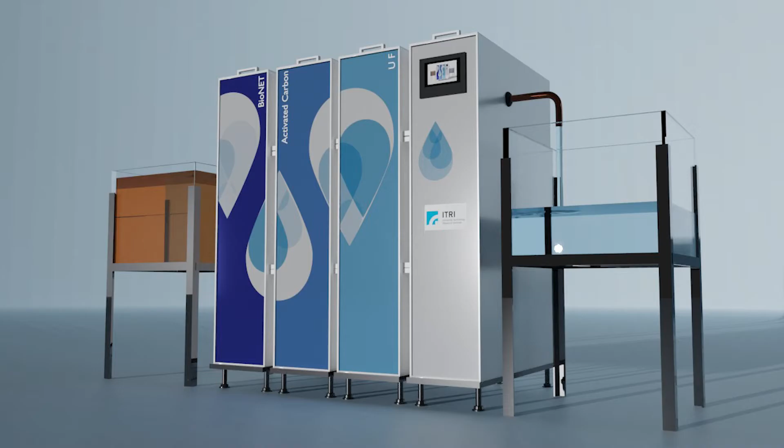I'm Dr. Chani Rallan, and welcome to this webinar where we will be showcasing the QWater system, which is a decentralized drinking water system, and the AIoT smart water solutions for water and wastewater treatment. Both these technologies have been developed by the Water Division at ITRI Taiwan.

So thank you to all our participants for joining us this morning. For the first session, which will be covering the QWater decentralized drinking water system, we will have Mr. WeiChieh Jen, who is a researcher at the Water Division at ITRI, and his research focuses on the development and commercialization of decentralized water treatment systems for drinking water.

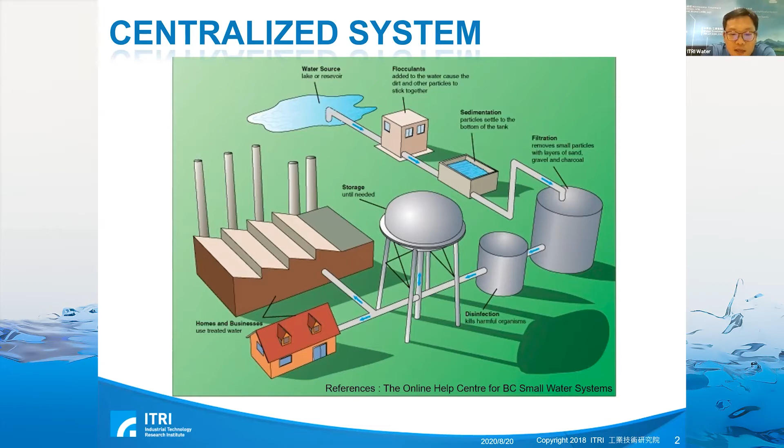The POE means the point of entry, so the water treatment system is before our house. And the POU, the point of use, is the water treatment system in our house. After the system, we get the tap for our water use or some bathroom water use.

In the developing areas, there's a lack of financial resources or technical support, so maybe they can't construct a bigger system. So maybe we can use these small scale systems to treat the raw water and provide drinking water for people. So at ITRI, we try to innovate a new type of water treatment system, which we call QWater.

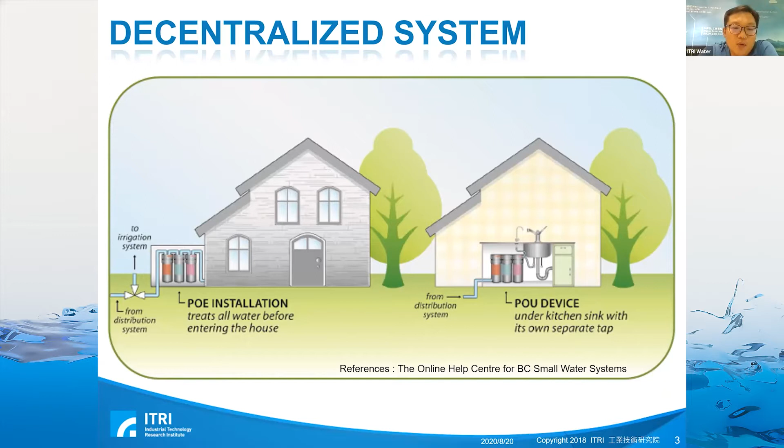So why do we want to do this? We know from data provided by the UN and the WHO that 2.1 billion people at home can't get safe water, and about 800 million people do not have basic drinking water service. 160 million people directly drink surface water, like the river, the stream, and the lake. This leads to one child dying every 2 minutes because they drink unclean water.

So why do we want to do this? We want to provide remote area people with clean water, and many diseases use water as the medium, so we can see damage to the central nervous system, virus infection, hepatitis, diarrhea, and some skin diseases. They are all caused by drinking unclean water.

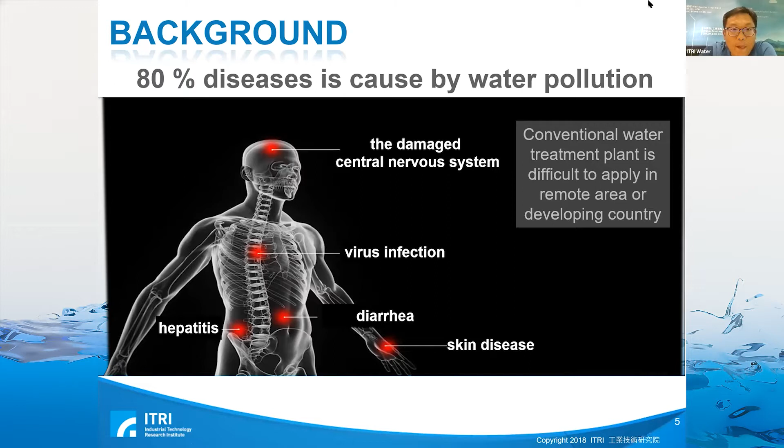And why do we want to do this? Because we had a big typhoon around 2000. This typhoon struck Taiwan and caused some places to not get clean water. You can see after a typhoon or some disaster, the raw water has high turbidity. And the traditional water system is very big, so it may take a long time for installation or fabrication.

And if we want to transport the system to the remote area, it takes a very long time because the road is broken. And in the disaster, electricity is very important in the disaster area.

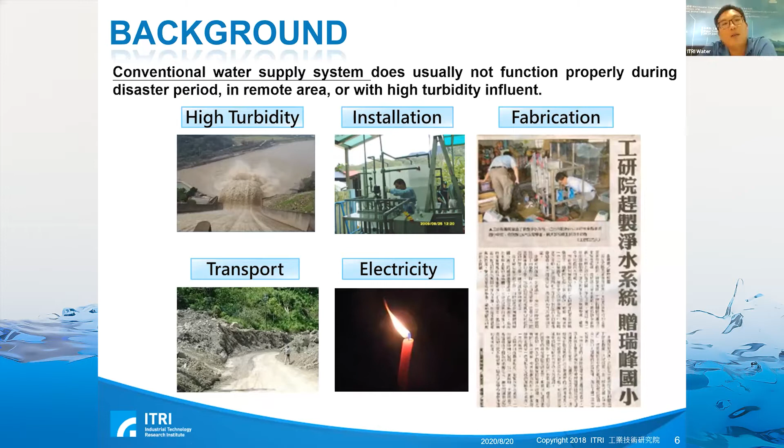So in conclusion, some points: one is the road is broken, so the system size should decrease and the weight needs to decrease, so it's easy to transport. And for water quality, we focus on turbidity and bacteria as the main pollutants, because after the typhoon there is sand or dirt, so the turbidity affects the drinking water.

The third is a long installation time. So we need to make an easy installation, like IKEA, so we can do it by ourselves and easily assemble it. And the final one is high power consumption. So how to set up an easy process that is energy saving and green.

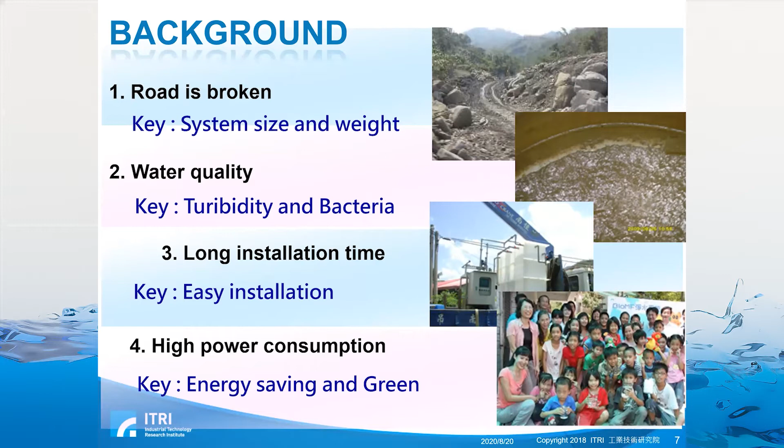So this is our QWater evolution. You can see in 2009 we had the BioMF system, but it was for wastewater treatment. So we wanted to change it, and in 2011 we got the first type of QWater. We modularized the system, and we can build and assemble the QWater in 20 minutes, the area is just 1.3 square meters, and the weight decreased to 400 kilograms. And one day we can provide 15 cubic meters of drinking water.

So after 2 years, we added the RO membrane, so the QWater has the desalination function. The building time increased to 60 minutes because some equipment and pumps were added to the system. The area is 1.8 meters.

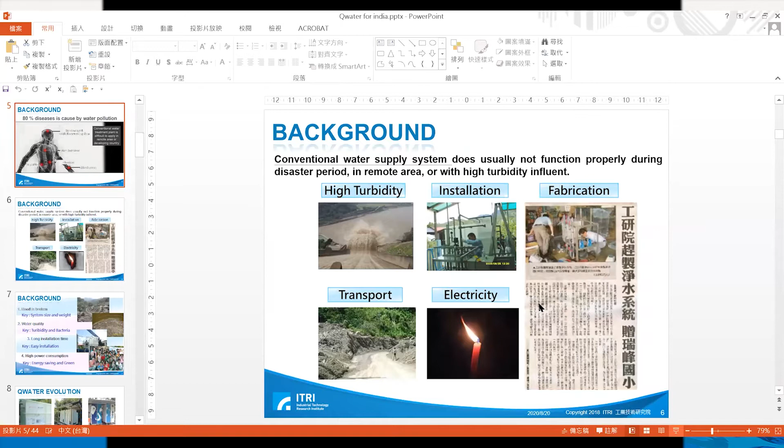Hello, Jenny. Hi, Anne. Is that clear now? Yeah, it's clear now. Okay. Sorry, so we're back to the previous slide, right? Yes, please. Is this slide okay? Where you're describing the different capacities? This page? No, the QWater evolution. No, the one before this. This one. No, the one next. QWater evolution. Yes, this.

Okay, let's start with the QWater evolution. We used the BioMF system from 2009, but this system is just for wastewater. The building time needs 3 days, the area is 12 square meters, and the weight is very heavy, 600 kilograms. The capacity is the largest, 24 cubic meters a day, but it's not easy to transport to remote areas. So we innovated the first type of QWater in 2011.

You can see the picture is modular equipment. We modularized the water treatment system, so the build time is 20 minutes. We have a small area, 1.3 square meters, and less than 400 kilograms. Each day we can provide 15 cubic meters of drinking water.

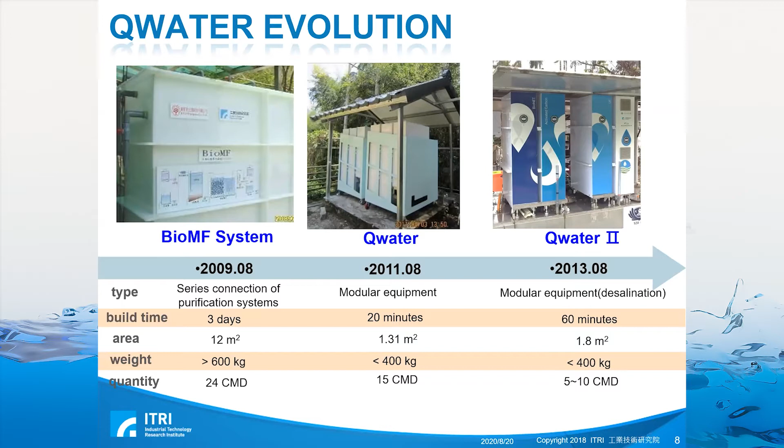So let's talk about the first type, QWater systems. Why do we call this system QWater? Because we have three Qs. The first one is quick: this system is easy to assemble in 20 minutes by 2 persons. The second one is quality: we can show and confirm this system meets the drinking water regulations with high water turbidity. In our test it was 3,000 NTU.

And the last one is quantity. We just need a 2.5 cubic meter space and can provide 15 cubic meters of drinking water per day. And it can provide for remote area people, at least 60 persons. So let's check the QWater's process. We use the pump to take the water from the lake or the river and pump it into our system.

So we can see the first one is the inclined plate. Why do we use it? Because it has an angle of 60 degrees. So the big dirt or some sand in our system will be intercepted by this. So the first one has the sedimentation function. We use gravity to let the water flow from this pipe to the bottom of the second unit.

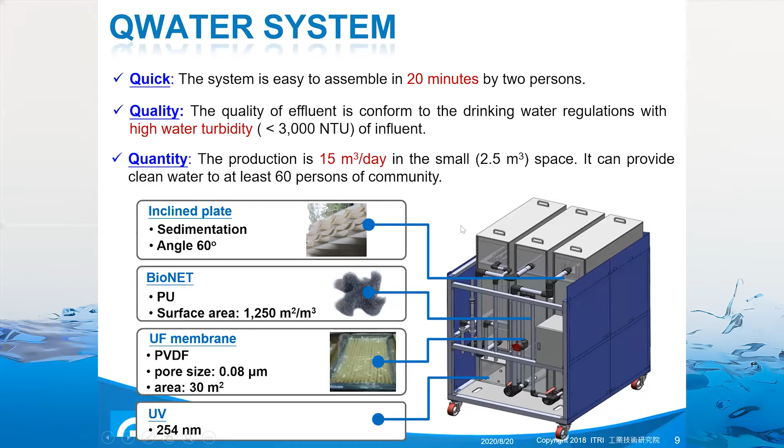So the filtration process is normally used in drinking water systems because the membrane is a useful and quick material to decrease the pollutants in the water. So we can see on the right side the material particle size is bigger: sand, silt, and clay are the bigger ones. So we use the conventional filtration process to decrease this material. If our pollutant material is smaller, like humic acid or some virus and small bacteria, we need to use the membrane to take it off.

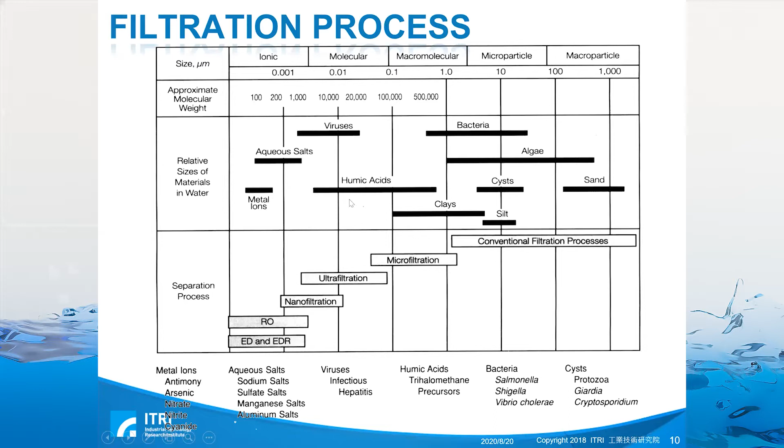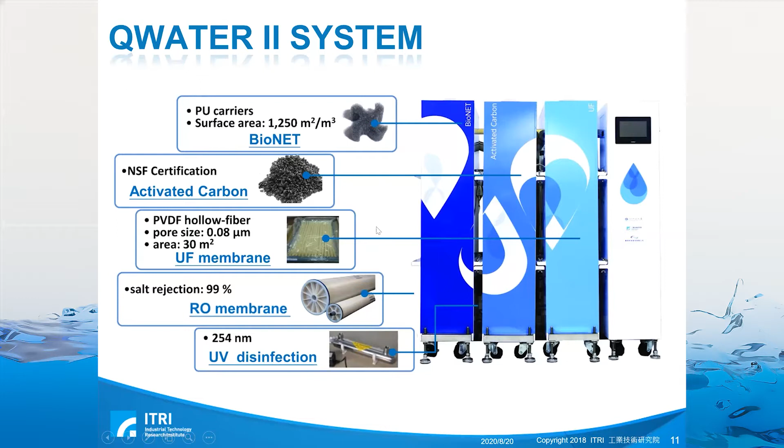And this system uses the bionet. The second one is activated carbon to decrease some active material. And the third one is the UF membrane. Okay, let's see a video to introduce the second type of QWater.

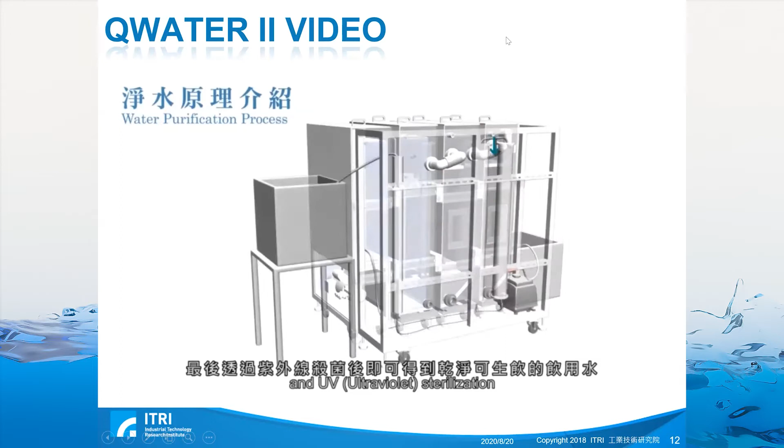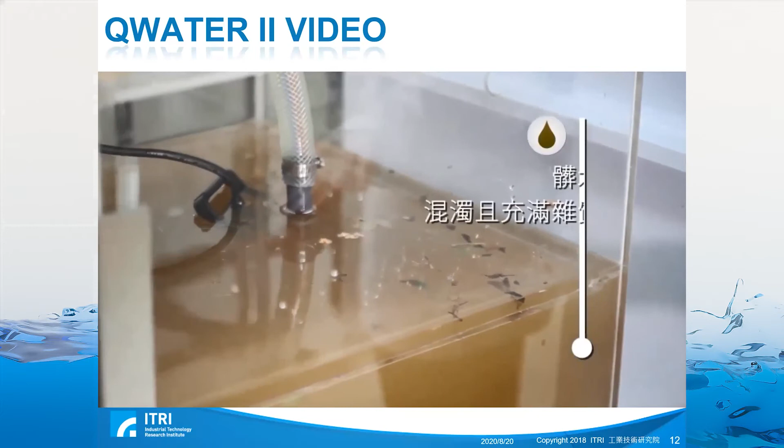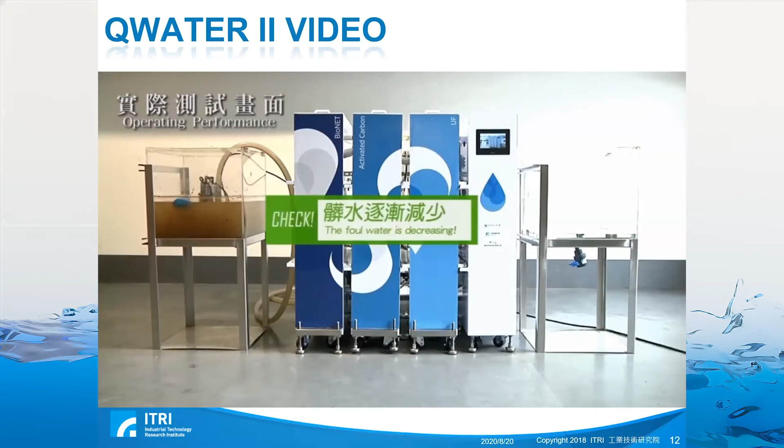So we can see the raw water is high turbidity, and we just use one touch to control the QWater system, and the system will automatically operate. So just a few minutes later, we can get safe drinking water. So you can see the turbidity is good, and the volume is increasing.

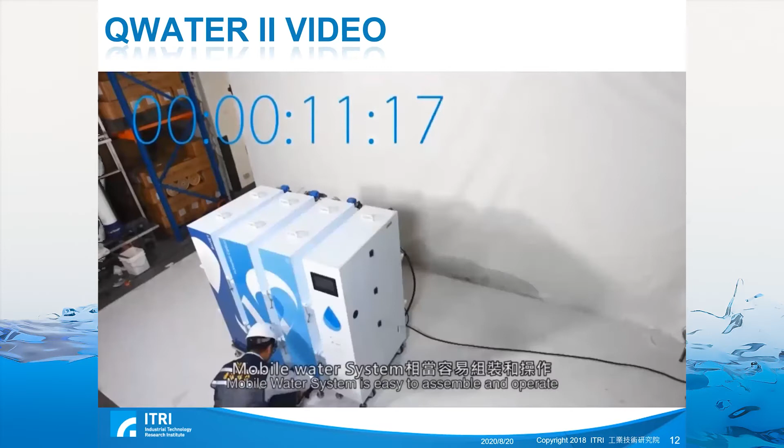So after the test, we will ask the people to drink this water. And we can see the assembly time is very short because we modularized the tank, so we can assemble it one by one.

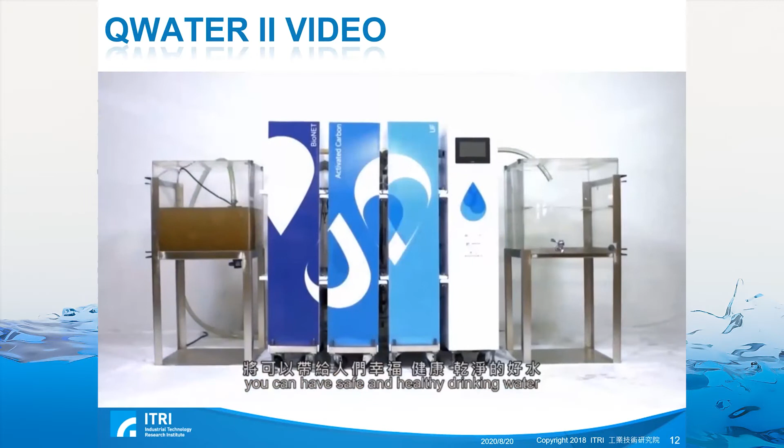Okay, so this one is where we utilize the QWater and combine it with a car to increase its mobility. So you can see it's with a famous NGO in Taiwan. We use the car and the water treatment system to provide disaster areas with drinking water.

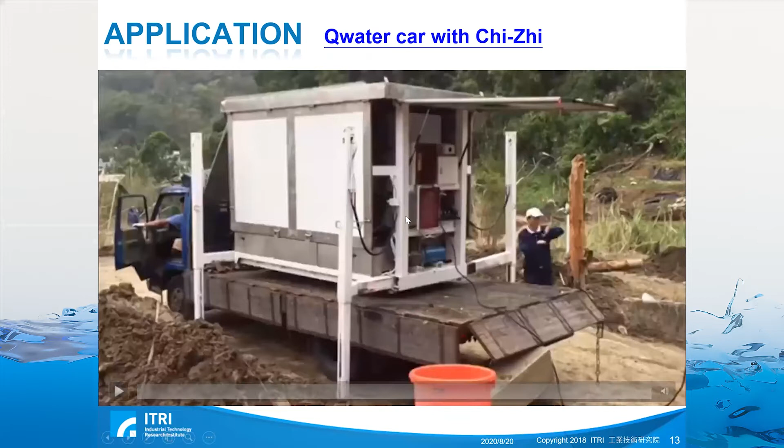So the first case, 2011 in Taiwan, Taoyuan City, is a remote elementary school. It's still operating until now, so it's more than 8 years of operation time. We set up the QWater in the remote area to provide the teachers and the students their daily water use, for classrooms, dormitories, and kitchens.

So there are 2 sets of QWater, which can provide 30 cubic meters of drinking water per day. And the power consumption is very low, just 1 kilowatt-hour per cubic meter of water. And the maintenance cost is just $1,500 USD per year.

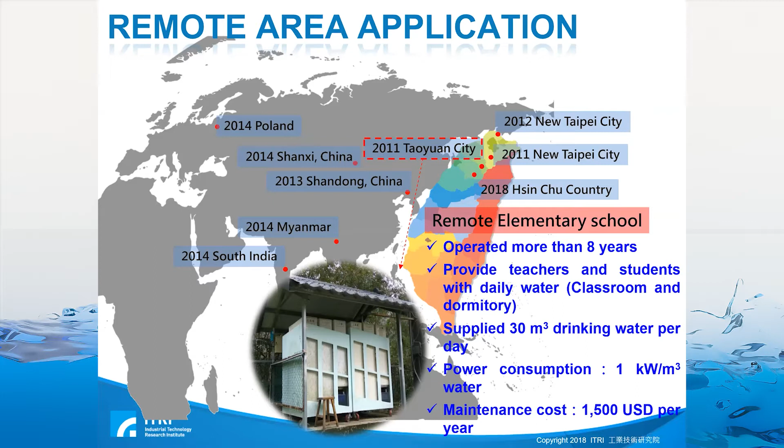In Taiwan, we also set up QWater and try the green power approach. We add solar cells and wind power machines to decrease QWater's energy consumption, achieving about 80% energy saving from the DC, the QWater, with stable auto operation over 8 years.

In the remote area, the big problem is high turbidity water after a typhoon or big rain. So our system needs to be equipped with high turbidity functions, especially given the far distance between communities. So auto control and auto operation are very important.

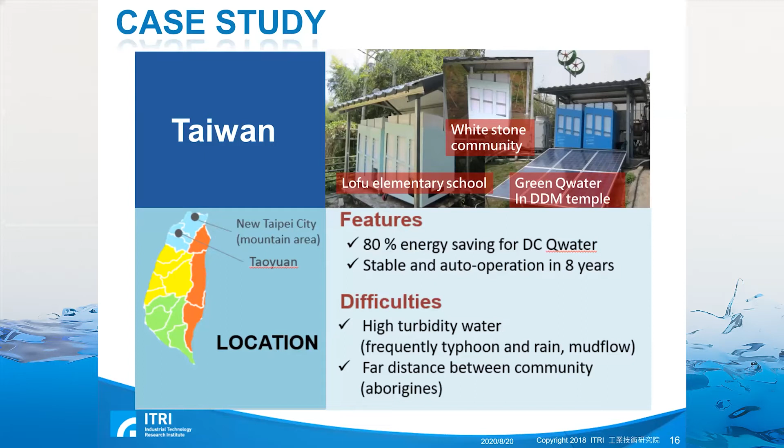Another case, we set QWater in a remote urban area and remote village. We use raw water resources, underground waters, and set up this QWater like a water station. People just put coins inside and they can get clean drinking water. This money we save and use to provide people's salaries and materials cost, so we can cover expenses from this money.

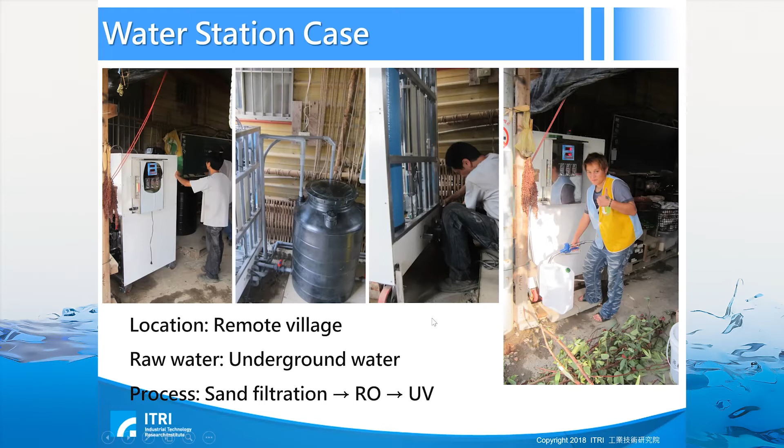So the process is very simple, and we also modularized this system, from sand filtration to RO to UV, to get the clean drinking water.

In this case, it's in China, for industrial applications like a ceramic factory or aquaponic greenhouse water use for people, fish, or farm water use. A big problem is that in China the water is very hard, so we need a different process to treat it.

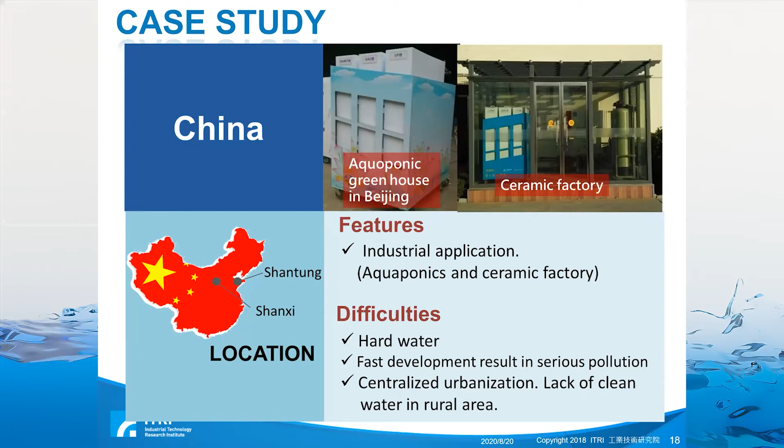And in this case it's in Europe, called Poland. We set up this QWater to get the CE markers, because the system needed to be used in Europe. They required us, ITRI, to get the CE markers. So you can see the QWater type is different.

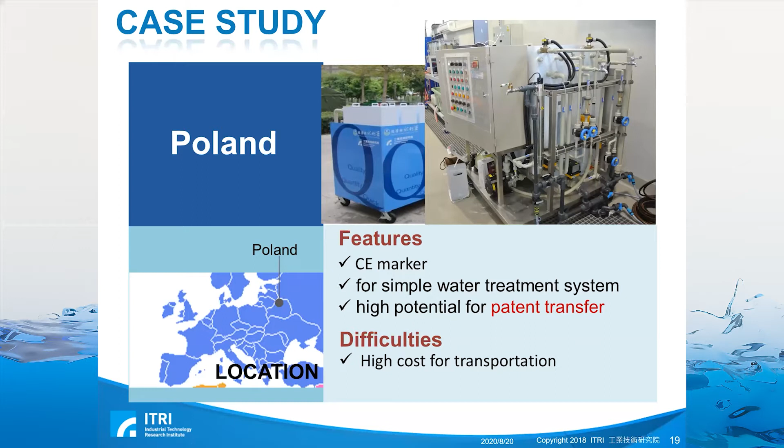This company has high potential for patent transfer, because if they buy the system from Taiwan to Europe, they will face high transportation costs. If they get the patent transfer, they have the right to construct this QWater in Europe. So you can see we got two CE certificates: machinery and the low voltage directive.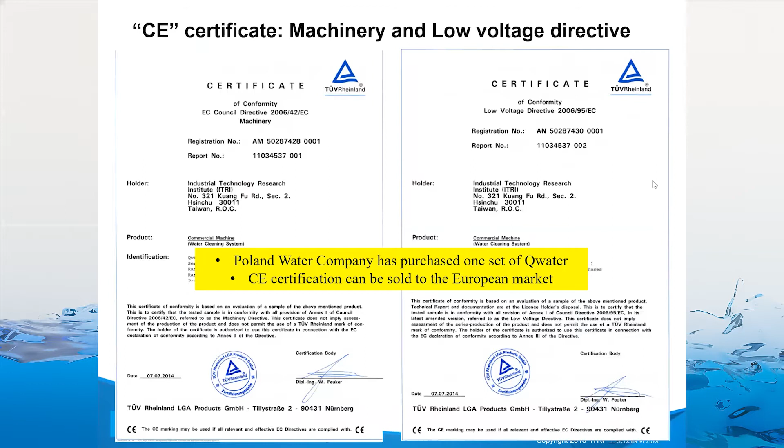Okay, the final one is South India. We set this up in 2014, in a Tibetan village. We use it to increase working opportunities, because they also sell the water to earn money for drinking water.

One liter of drinking water, we sell for 0.17 USD. In the local place, we faced terrible public hygiene, and the far distance between communities increased transport time. The water is also very hard, with TDS of 600 to 1,100 milligrams per liter.

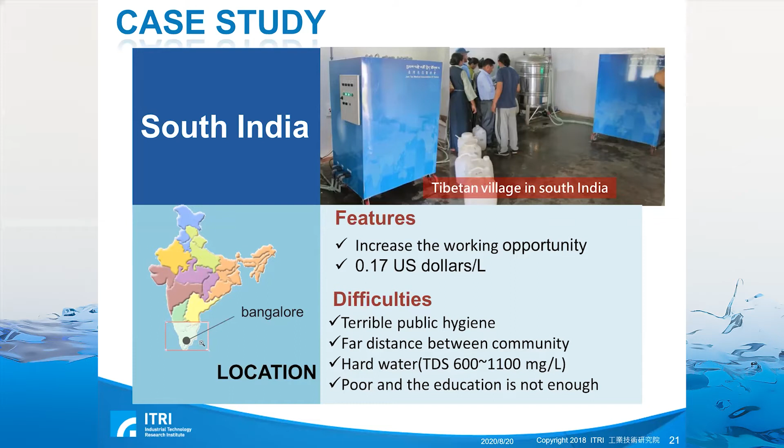So we share some pictures about this. The village is around the Mysore district, in Karnataka, beside the temple.

We designed this modularized system to draw raw water from underground water resources, but the process is somewhat different. We use a pre-filter, then active carbon, then UF, RO, and finally UV.

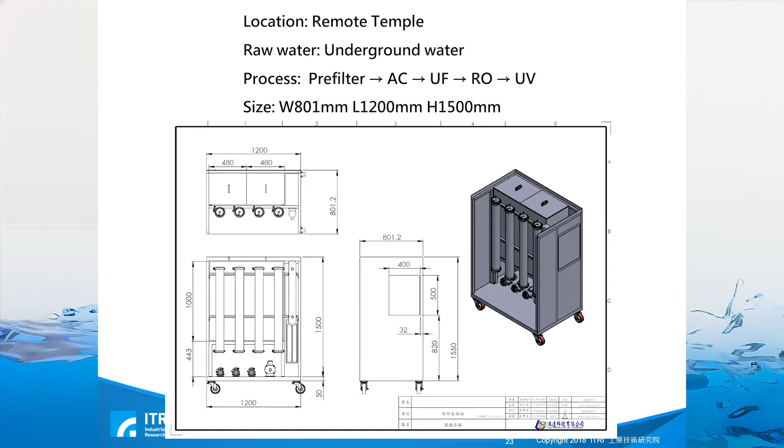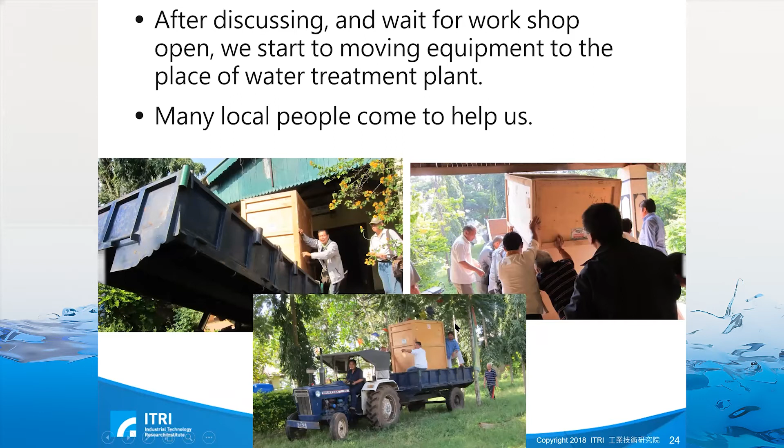So we transported the system to the local place, finding a car to carry it to where it was needed. Local people helped me take the systems up and down. On the first day, we just set up the system.

You can see it's the raw water tank and the drinking water tanks. The water will go through our system.

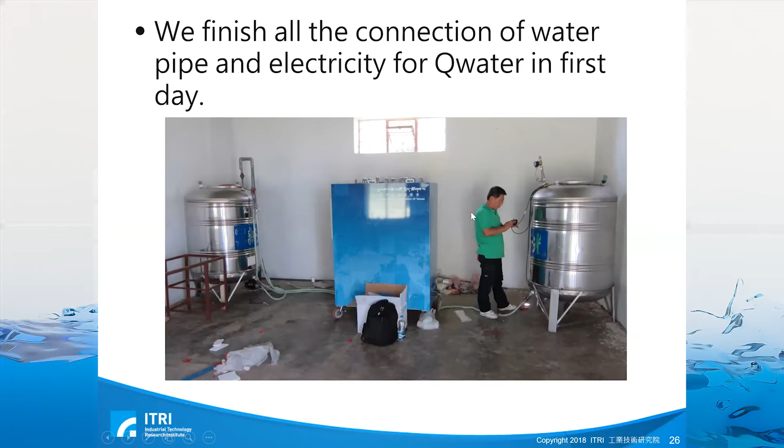So finally, we show the GAC, the active carbon. You can see the color is very bad, very dark. After the UF and RO, you can remove some turbidity, organic material, and bacteria to get the drinking water.

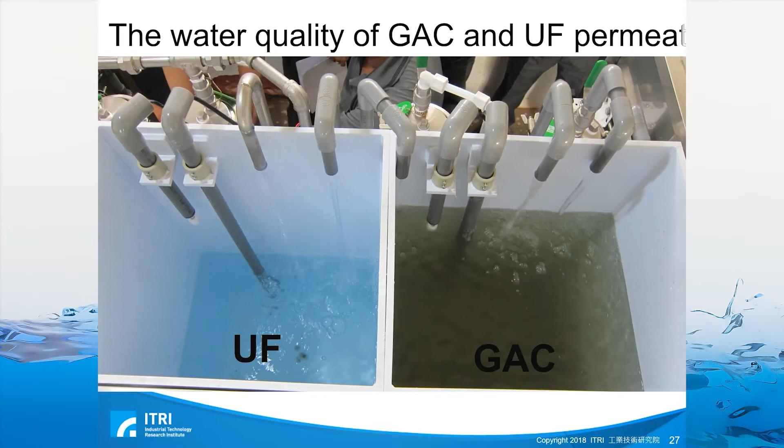Okay, so you can see after our system, many people are waiting to take this water.

Okay, finally, we want to conclude with our QWater. We have two types of QWater, separated by water production rate. One type can provide 15 cubic meters of drinking water per day, but they can only remove turbidity, organic matters, and bacteria.

If we want to treat seawater or brackish water, we need to use the desalination QWater, so the process will be different. Energy consumption also differs: for seawater, the consumption is large, about 4 kilowatts per hour. So regarding operation cost, you can take that into consideration.

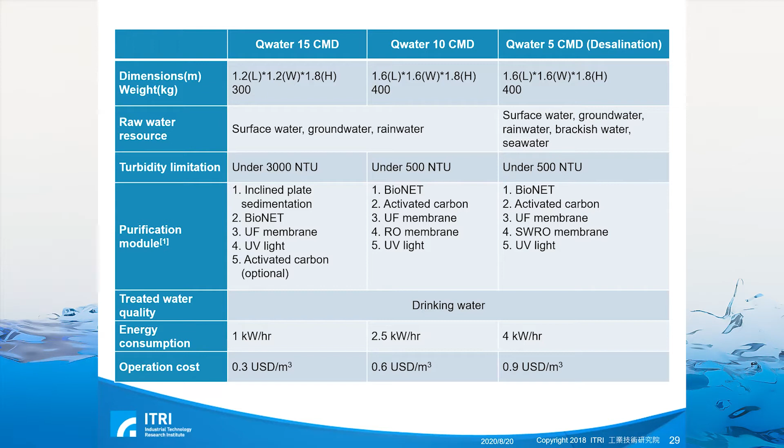Okay, finally, we also combine QWater with IoT. Later, Dr. Rowe will introduce some cases about water treatments and IoT. We can collect data from monitoring equipment, and the data we collect will be used for design factors.

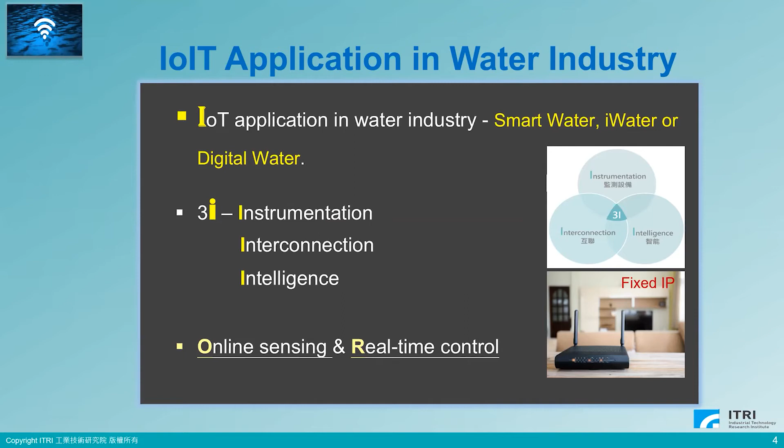Beyond this, we add another two things in our system: one is online sensing, the second is real-time control. So under those components, we make our system not only an IoT system, it's an IoIT.

After we put sensors in our system and collect data, we can form big data. I think nowadays people use big data for visualization, to show data on a dashboard or display to make it into information. But we want to do more. We want to explore the value of that data, and also apply it, do some application of that data. So we call it moving it from IoT to...

intelligentization. That is, the system can sense the change of environment, and also it can memorize and do some adjustment. It can learn and it can adapt. This is the beauty of big data. Especially we want to focus on a new technology, AI, artificial intelligence. So we put AI and IoT together, and it becomes AIoT.

Nowadays in the water industry, some problems still need to be solved. The first thing is we have to reduce the abnormal discharge, in other words, make effluent more stable. Also, we have to reduce the energy consumption and the material usage of water treatment. Then reducing the input of human power and reducing human error are also important.

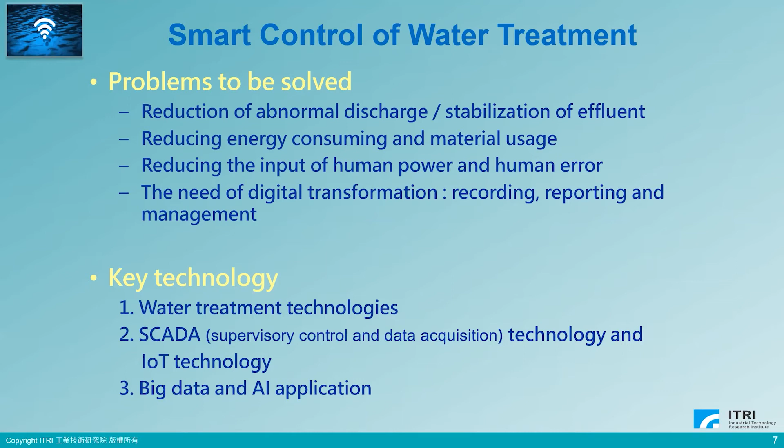Okay, the features of iWater. We not only do automation, we are moving from automation to intelligent, from A to I. How we do it, I will introduce more later on. We use SRP. What does SRP stand for? It's Solution Ready Package, not only a component. It's a package, including sensor, IoT gateway, interconnection, as well as the device we want to make some change to control our system.

So we use SRP to serve water purification, municipal wastewater, industrial wastewater, agricultural wastewater, water reclamation, and we also make seawater into sweet water. Then we use an intelligent management platform with a visual display to provide the functions of monitoring, remote control, and supervision management. We are using IT to enforce, to support OT. IT is information technology, OT is operation technology.

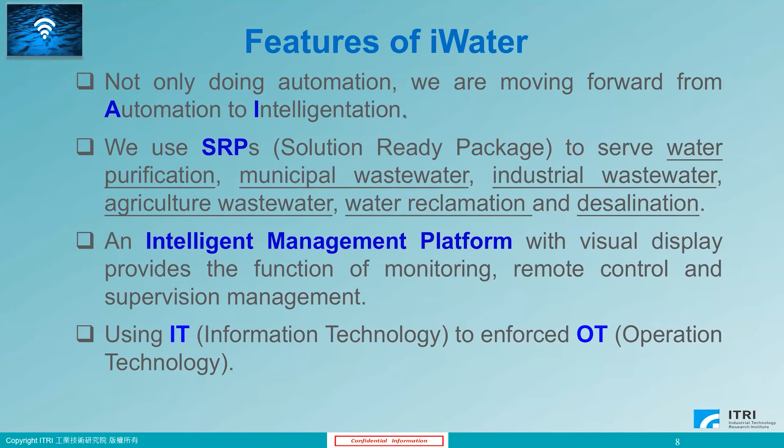Many people, when they hear about AI, worry about losing their jobs. Actually, we use IT to support. We are not using IT to replace OT. We use it to give people a better working environment in their water and wastewater treatment plant. Okay, then I'm going to talk about from A to I, that is from automation to intelligent.

I think PLC is widely used in water and wastewater treatment plants. Probably more than 98% of the plants use PLC to do automation. PLC is very stable, cheap, and it can do repeating things, so it's easy to apply it to do automation. But in this kind of automation, normally the operation condition is decided by engineers. When they do design or the test run, they have already made a default value in the PLC system.

But is that setup point the best condition for a water or wastewater treatment plant? I would say probably no, because the influent of water or wastewater is always changing, including quality and quantity. So under that condition, it's not easy to use just a single condition to operate with all the different kinds of influent.

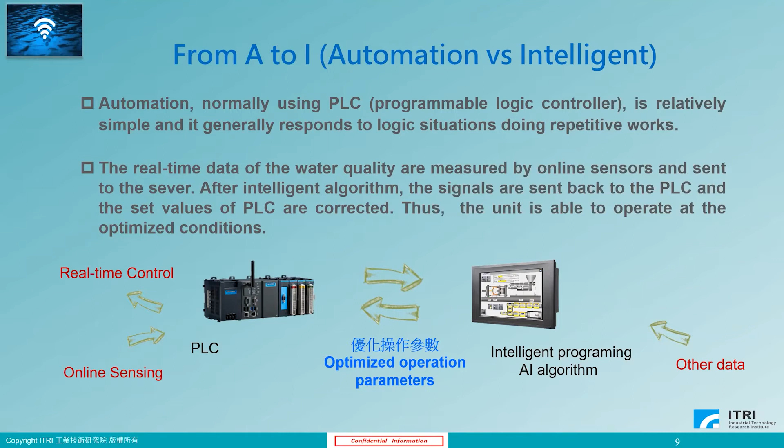Probably some of you wonder why we can use AI for water treatment. I think there are two main reasons. The first one, which I have already talked about, is the variation of influent. To overcome this problem, in university our professors always teach us you have to consider a safety factor, because your influent is changing. So from the engineering side, you put safety factors everywhere, and from the operation side, you also want to guarantee the water can fit the discharge requirement.

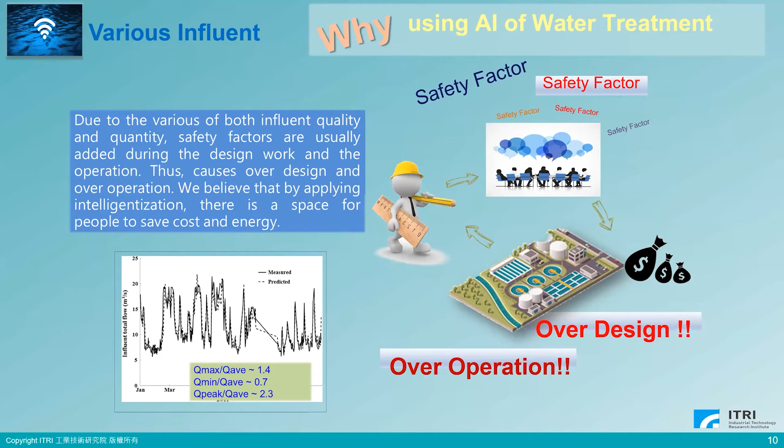So you put more air into the reactor, you add more chemical into the reactor, and it ends up as over design plus over operation. So you lose a lot of money. The second reason we think we can use AI is the models we now use. We do the function design, we calculate, we determine how large a facility we want to build using theoretical models, and these models are very complicated.

Take biological treatment as an example. Now I think Activated Sludge Model No. 3 is the most popular one, widely accepted by universities, engineers, and in many different situations. But it is very complicated. For example, it includes 21 biological processes, 49 parameters, and more than 100 coefficients. So if we want to handle this model, it's not so easy, and the result of the prediction is also not so good.

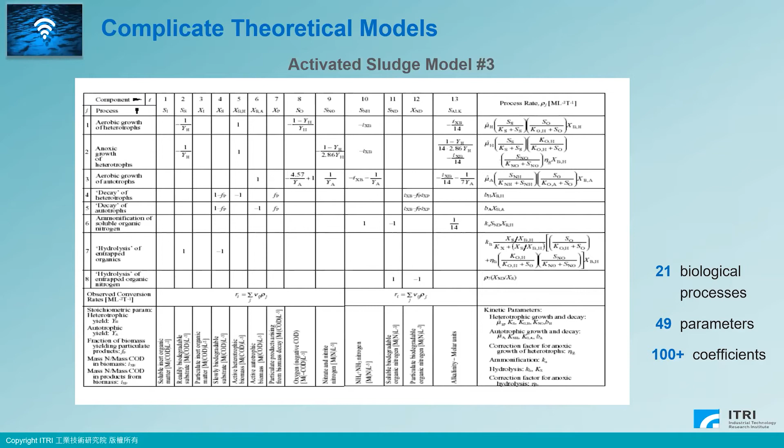But if we use data science, then we can solve those two major problems. With AI machine learning, we can put different kinds of data into our input layer, and into our hidden layer. The hidden layer is normally an algorithm, a model to calculate for your input layer. And then it comes out as output. This output can be minimization, optimization, or a certain value. So you can set up an objective value for this system. So by using this model, we can do prediction or automation applications for water treatment.

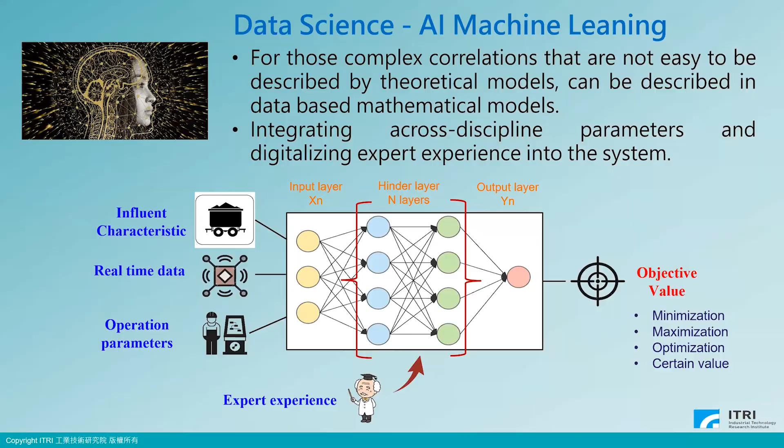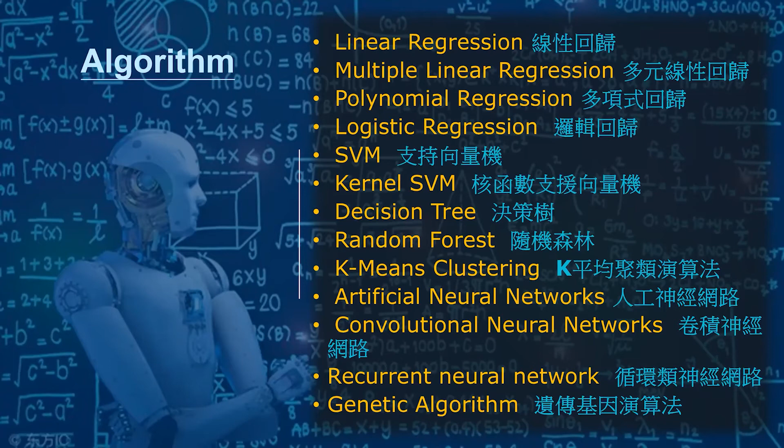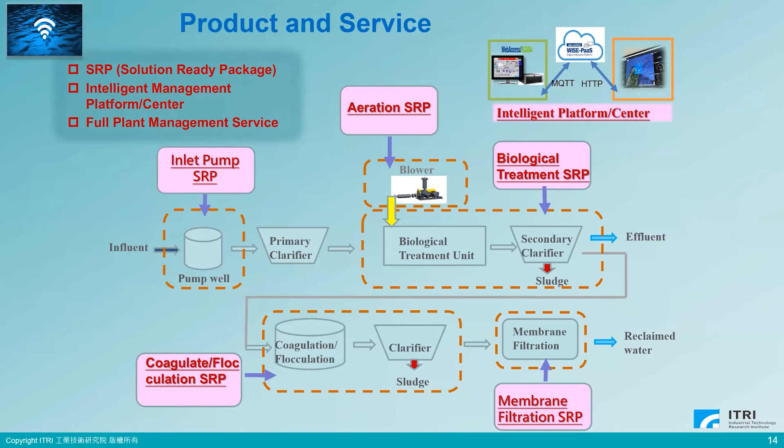Stages of smart water control. The first step, you can build a visual command center. We go to the plant and give suggestions on which kind of data you want to collect and which information you want to show on your dashboard. Then we come back, make big data through the SCADA system, and design a dashboard. So it's customized. We discuss with our customer, then we make the dashboard and system they need. This is the first step.

After the first step, we have already collected data. The next step, we can use that big data, and through intelligent software, make smart control of the system. We send the signal back to the device, so we can change the device. Of course, you have to make some changes to your device. If your motor or pump is fixed speed, fixed frequency, then it's not easy to do smart control. You have to change it to a variable frequency device.

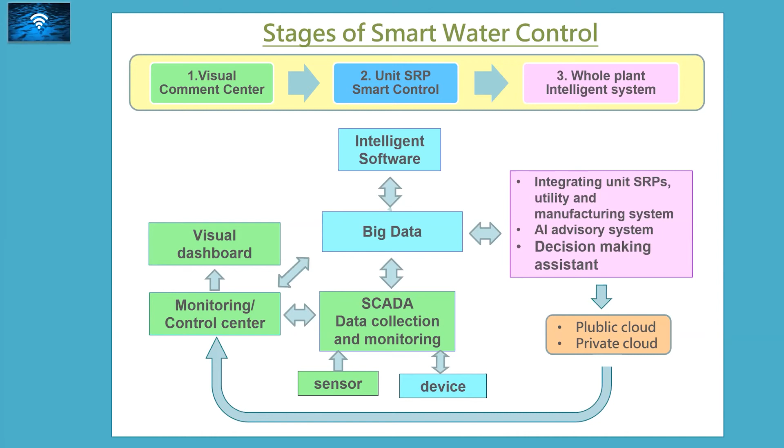After that, we can move to the third stage. In this stage, we can do a whole plant intelligent system. We integrate unit SRPs, utility, and manufacturing systems. We add that information together into a platform, so we can do a whole plant intelligent system. In this smart control, we can apply public cloud, and we can also use private cloud. It's up to the customer which kind of system they are using.

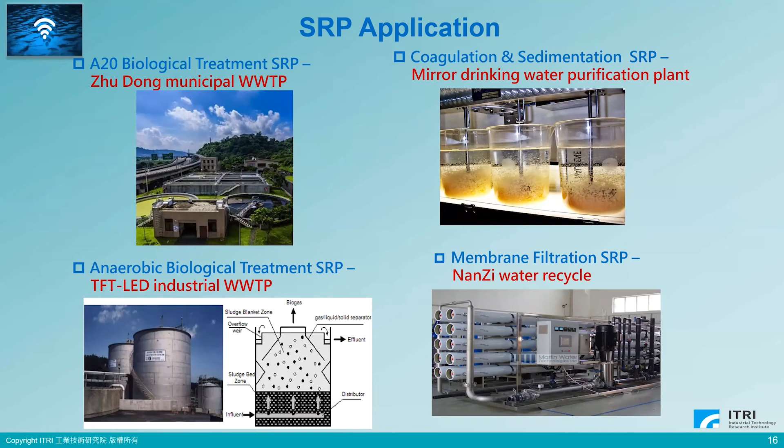Now I'm going to give you 2 examples of how we use those smart control SRPs in real plants. The first case is about using an AI model to predict the biological treatment effluent. The second one is how we use AI to do smart control of accurate chemical dosage for a drinking water purification plant. In the first case, the plant is an industrial wastewater treatment plant.

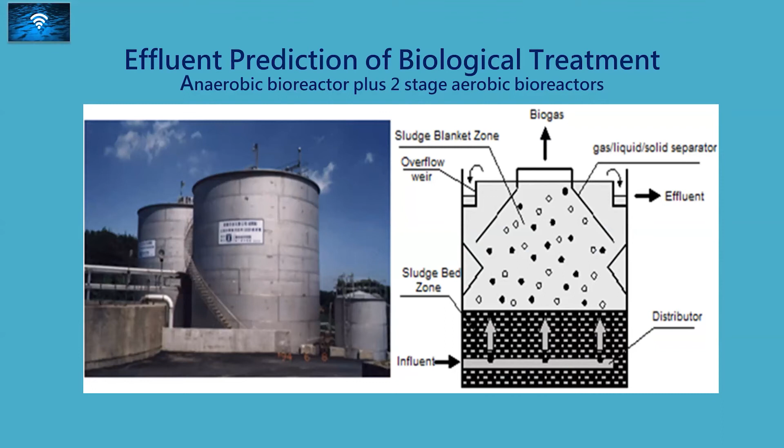It includes 4 anaerobic bioreactors plus 2-stage aerobic bioreactors, and we do the prediction for the effluent of the anaerobic bioreactor and also the aerobic bioreactors. The input layer we put into our system includes data from online sensors. That is the basic one. We also collect data from the lab water analysis. We do some data treatment, making the time interval even, so we can feed the data into our hidden layer. We also have data gained from data treatment. In total, more than 200 items were taken as input features.

The AI algorithm we use is SVR, support vector regression. The output layer includes COD, SS, VA, volatile acid, and PA. PA is partial alkalinity. The purpose of this model is to predict the effluent quality 16 hours from now. So if it exceeds the limitation, it gives you a warning. So you get an early warning.

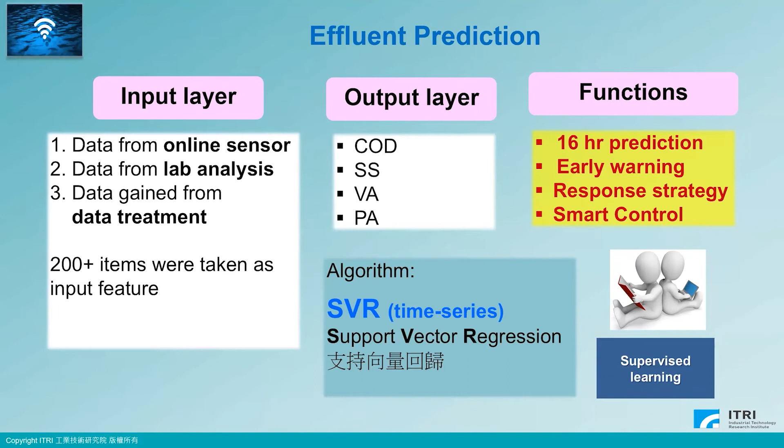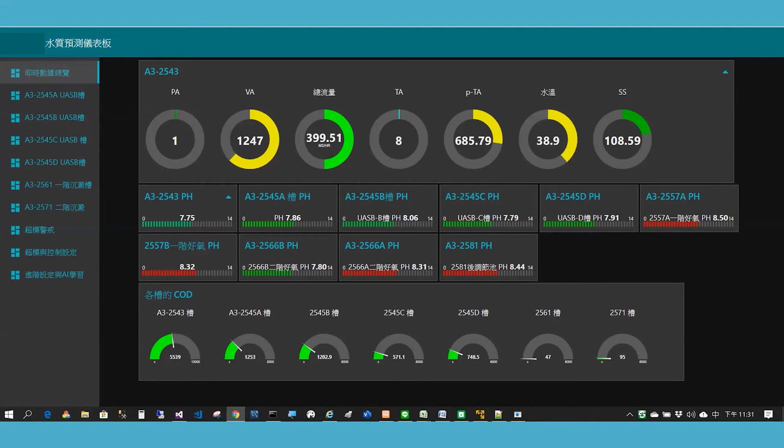Okay, this slide is the dashboard. We show the current data of the whole plant. And we use different colors to distinguish the condition of different units. For example, green is safe. Yellow is you have to pay attention to it. Red is it exceeds the limitation.

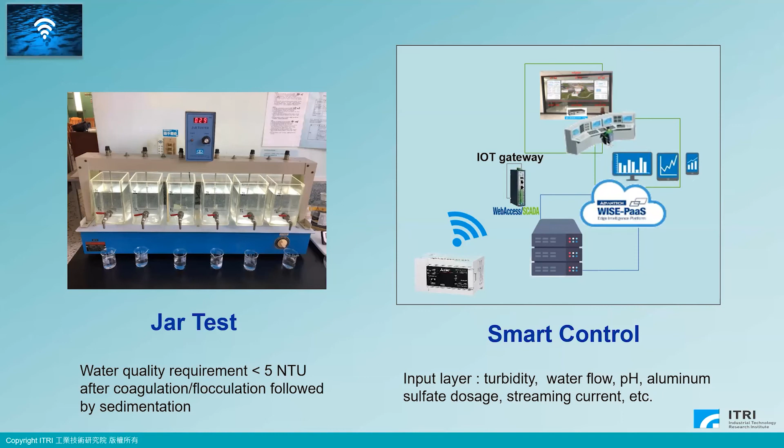And which one is the smallest? That is the amount of chemical we add into the water. And this test takes around 2 hours to do. So every day you do a batch of this test, and you get a result to change your dosage. But we decided to use AI to replace this kind of work. The input layer we use is turbidity, water flow, pH, and also the chemical dosage, streaming current, and so on.

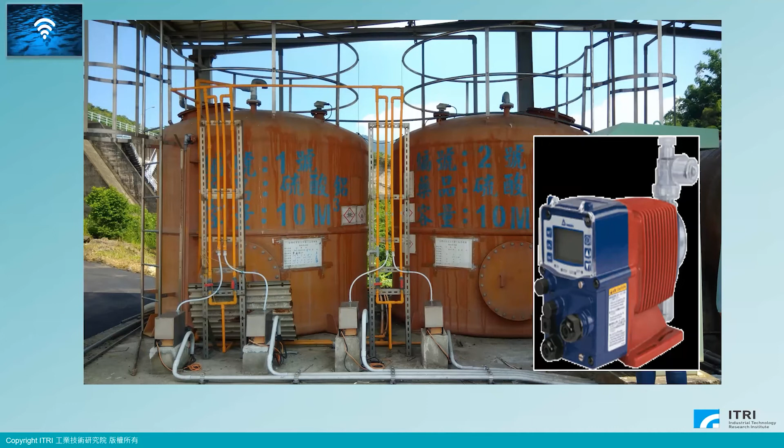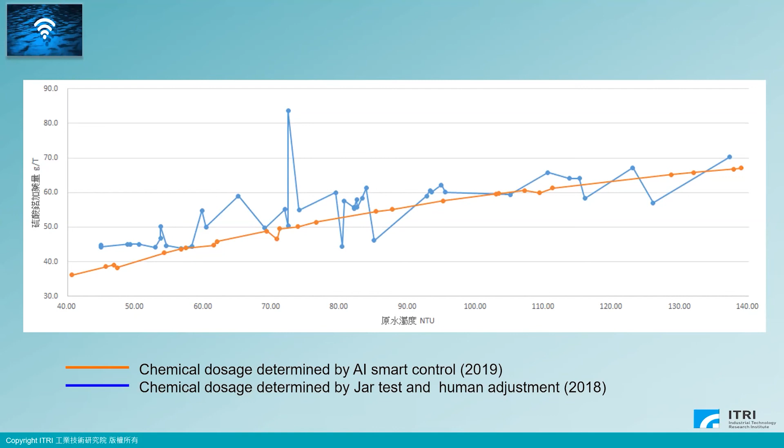Okay, this is the result. The blue line is the dosage from 2018, with the chemical added by operators. And the orange line is our AI smart control. So we can see it becomes smoother. And also we reduce the dosage of chemical. From this table, you can see we saved chemical dosage by up to almost 20%.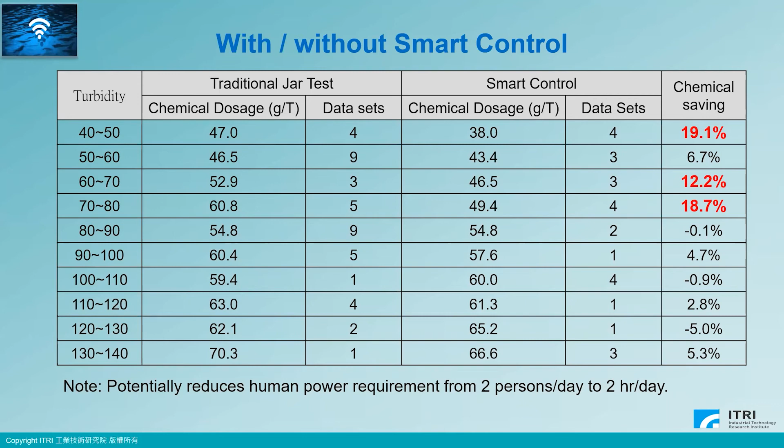And for this plant, I think we also fit the requirement of the owner. They want to reduce human power input, and we can do that. With this system, it's possible to reduce from 2 persons to 2 hours per day. That is, people don't have to stay there the whole day long. You have to go there every day, 2 hours, to check every situation, whether it's in good condition, and that's okay.

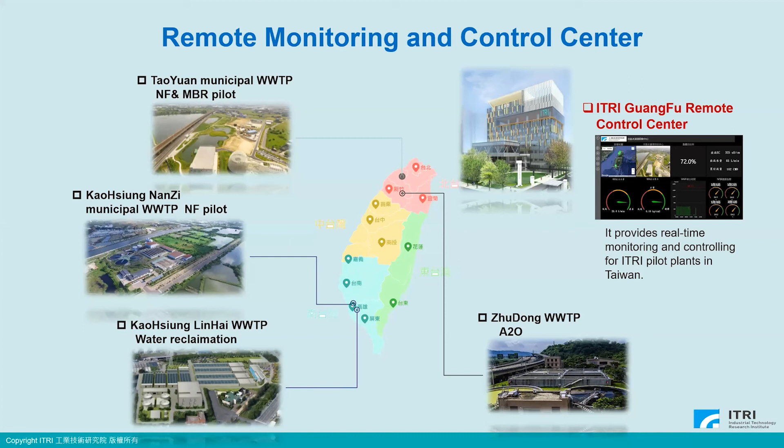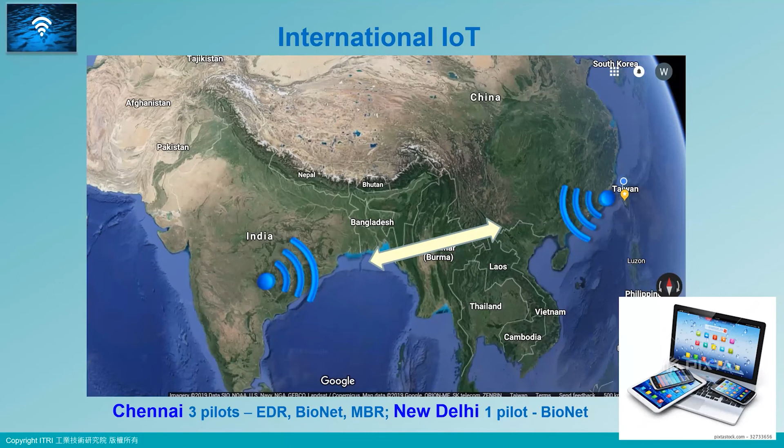In Taiwan, in Hsinchu, we have a remote control center. In this remote control center, we collect different data from pilot and full-scale smart control plants in Taiwan. So in Hsinchu, we can see more than 10 plants' operating conditions from all over Taiwan, and not only in Taiwan, because it's IoT. Through Wi-Fi, we can also get information from overseas. We have 4 pilots in India, in your country, 3 in Chennai and 1 in New Delhi.

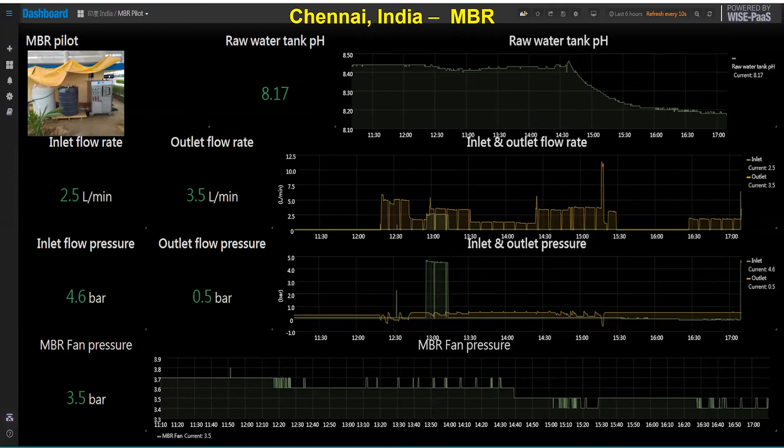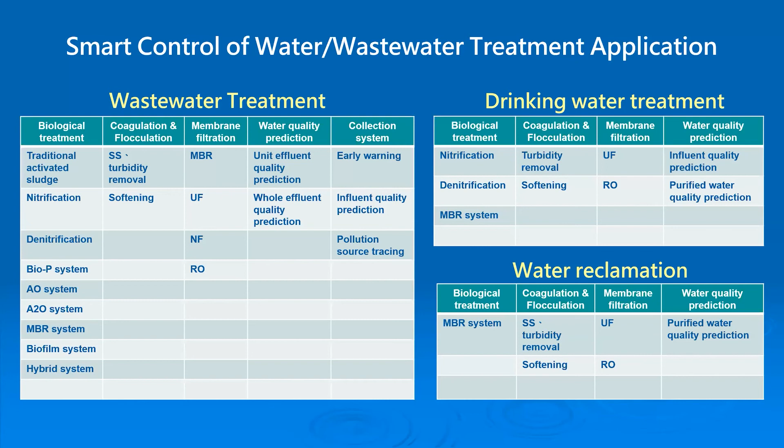Okay, and this slide is the dashboard from Chennai. It's an MBR pilot. Okay, I think we're close to the end. With this smart control, we can serve wastewater treatment, drinking water treatment, water reclamation, and also collecting systems. I think it's an opportunity for the water industry, and also a big opportunity for this business to move to the next stage.